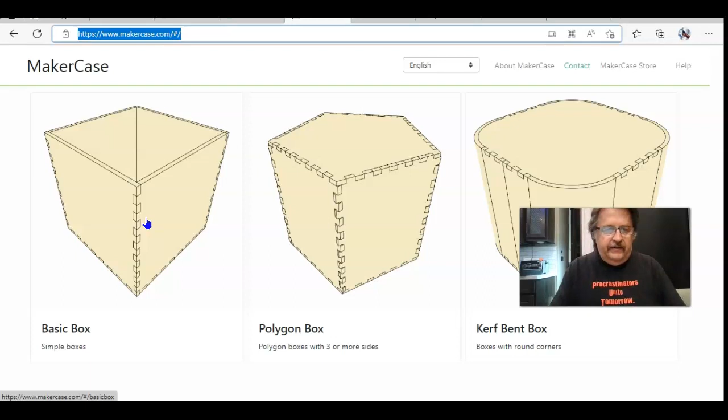So you want to go back to part 1 of this series to see how we got to where we're at with this project so far.

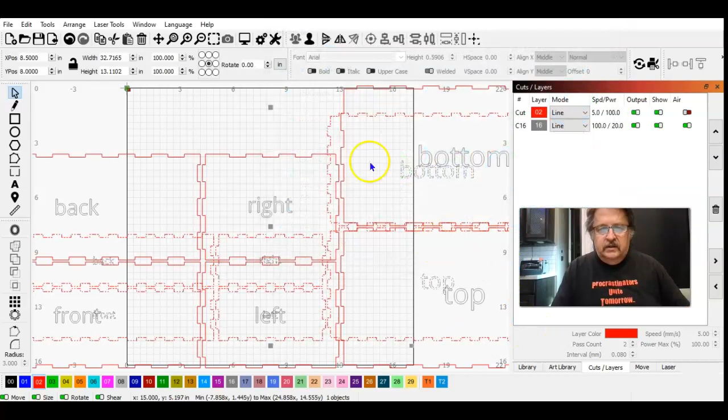Now we're in LightBurn. Essentially, I created 2 boxes using MakerCase. It was pet stand, and I wondered if I could import both at the same time. We're going to find out. Open - yeah, we can. Hey, I just learned something new, I can import 2 projects at the same time. All right, let me back out of here so you can see, and separate these. So this was the first box, and this was the second box that was created in MakerCase.

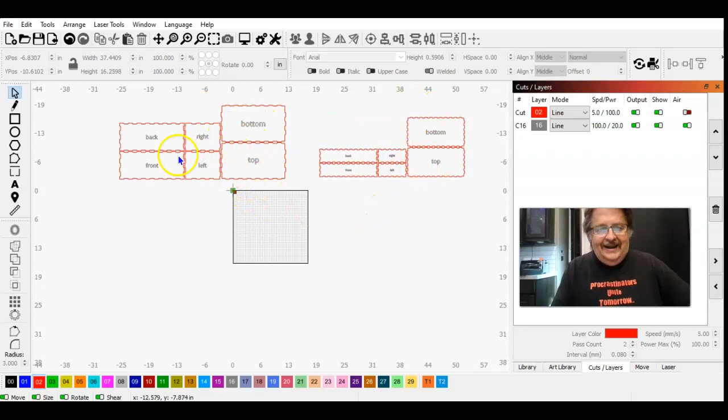I used these 6 pieces and these 6 pieces and edited those down to create this one, I think. No, we don't need to save that. There we go. I'm not sure that's it either. We'll open this one. That's the right one, okay.

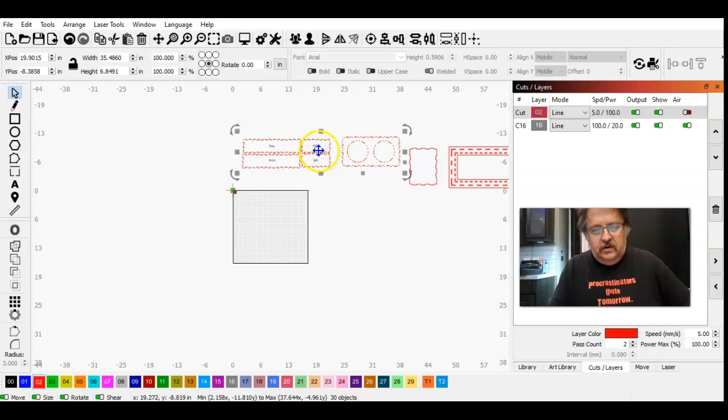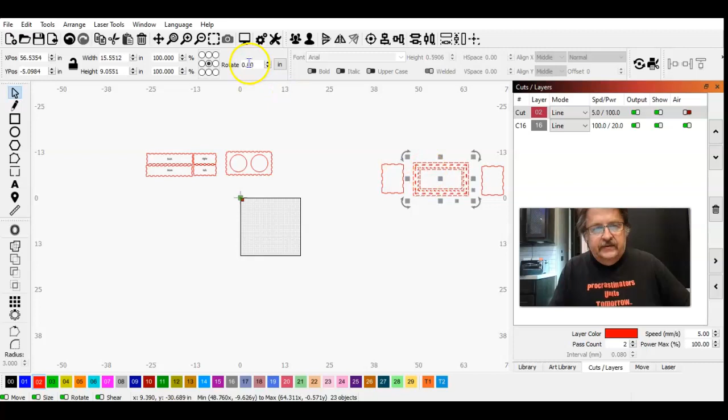So this - 1, 2, 3, 4, 5 - these 5 pieces are part of one of the boxes. I got rid of the 6th piece because I didn't need it. I actually integrated the 6th piece into this piece in order to create these, which will assemble to make a partial cube that will snap to this piece. And then these 2 side pieces here are 2 of the 4 sides that were created in MakerCase that are going to be edited to create the legs that will snap into the bottom of this piece from underneath.

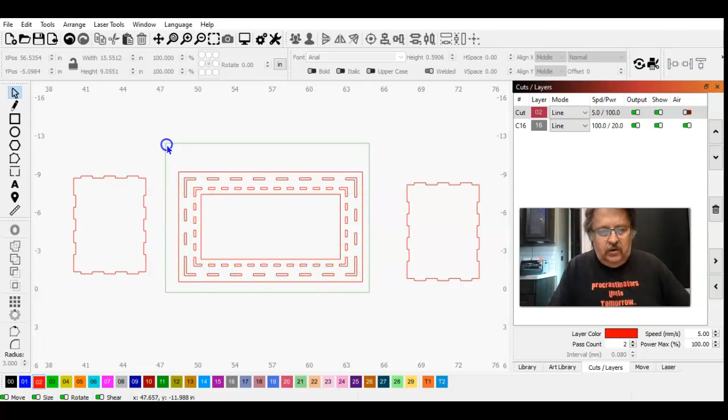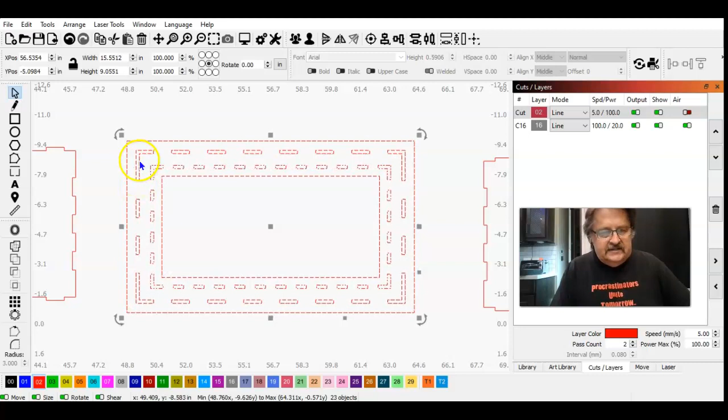So now you've been caught up. All right, I need to work on this piece here a little, because I've got a lot more holes in here than I need, and I want to make the shape a little more user-friendly. First off, I'm only going to need the slots - 1, 2, 3, 4 slots on either side here. And these 4 slots have been merged with these to make an L shape, which I don't need in this case. So I'm going to have to modify this and delete those.

So actually with that highlighted, let's break everything apart. And we're going to hold down our shift button and select each of these pieces, and hit delete. All right, that got rid of those.

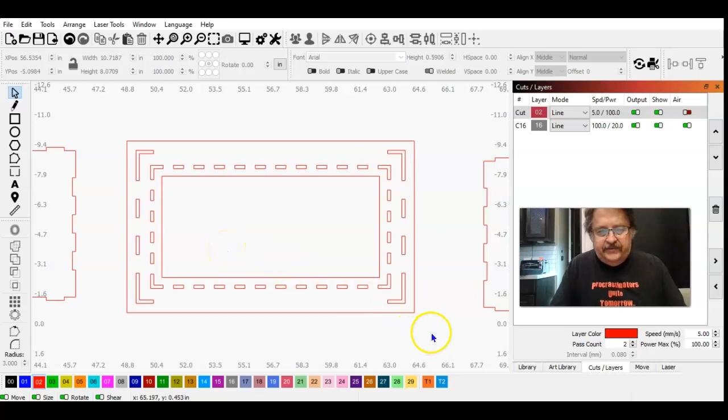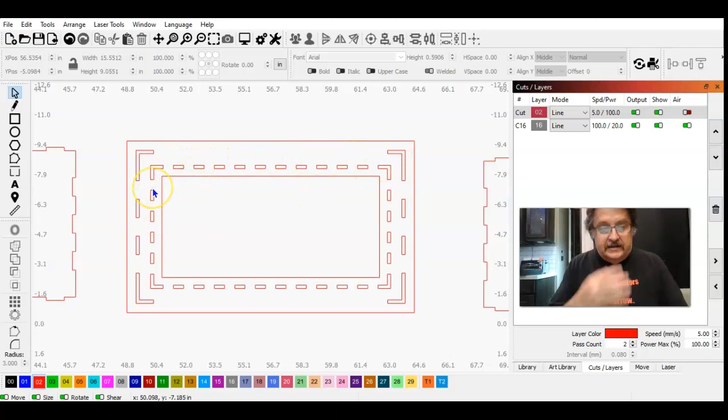Now I need to clean up these pieces. What I'm going to do to keep everything where I need it to be, I'm going to try something - I don't know if this is going to work, but we're going to try this. First thing I'm going to do is lock this to my tool bed, using arrange, lock selected shapes, so that I don't inadvertently mess up this pattern, because it's crucial these slots stay where they're at in order for everything to line up. Now with that locked, selecting just that one, I'm going to duplicate it and move it off the tool bed so I'm not messing with my original design at all. Now I'm going to zoom into that piece, and zoom out a little so we can see it better.

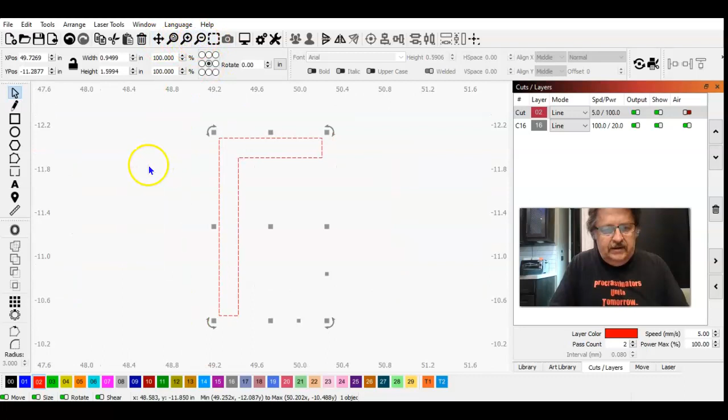There's probably a better way to do this, but this is how I do it.

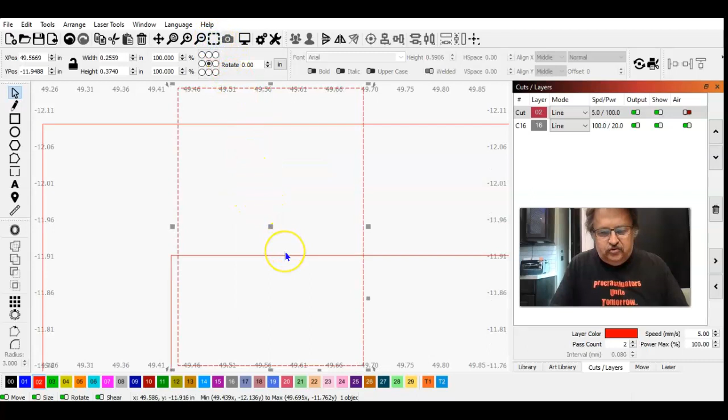I just create another rectangle that I'm going to use for a cut piece. I need to make sure I get those lined up as precisely as possible, so I'm going to zoom into that. Now I've got my control arrow set to a very minute movement.

I should hit control and arrow left until I'm looking for that series of Vegas lights, as I call them, to disappear. You see how you no longer see them? Back it off a little, now you can see them. So that's telling me once they disappear, that's too far. That's lined up as precise as I can get it.

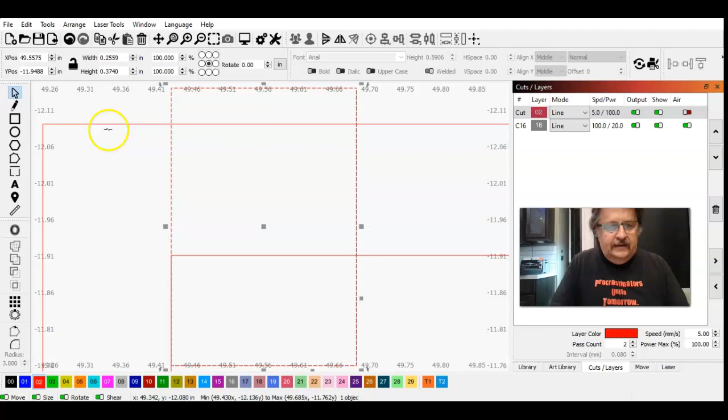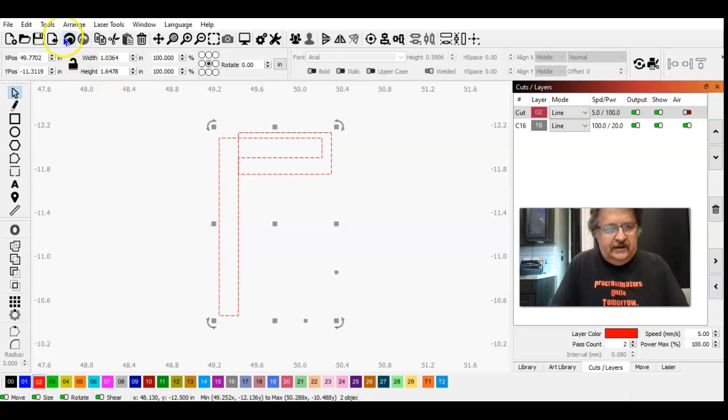Now, if I select the main shape again and zoom out to that, I need to cut that. Actually, I'm going to encompass all of it like so. Now with that selected, hold shift, and use my assistant - if you've been watching my videos, you know this is my best friend. Don't want that, don't want that, don't want that. That's what I want.

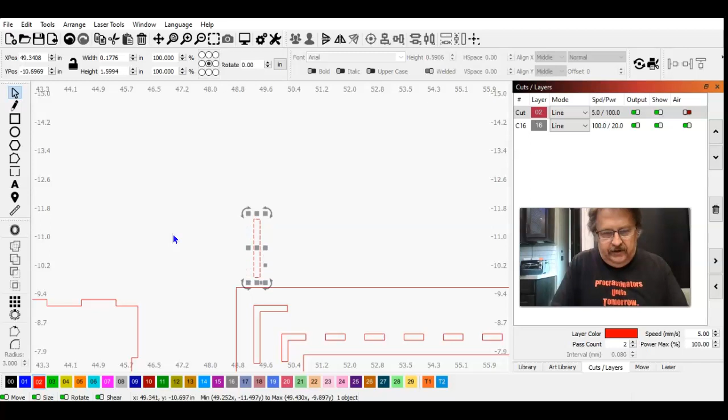Okay, done. Now I can zoom out, zoom out. Now, when I moved this a minute ago, I just moved it straight up, so I can bring it straight back down with my arrow keys, and that put it right back where it was at. Now if I select that, we can see that nicely.

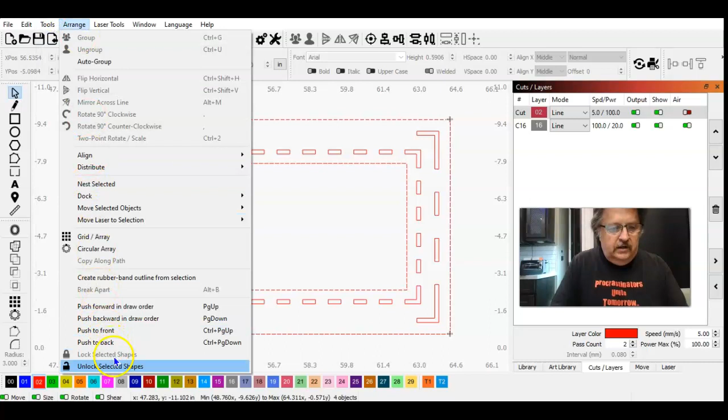Remember, I've got it locked in place, so with it selected: arrange, unlock selected shapes. Now I'm going to click on that one, the long part, and delete. Nope, why is it still showing to be locked in place? All right, arrange, unlock, select, and delete - it's gone.

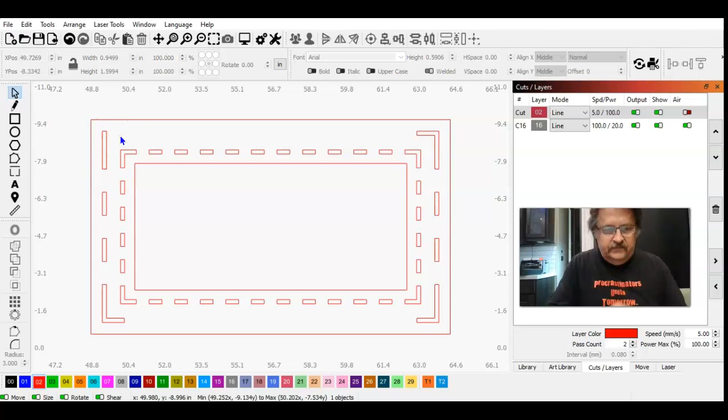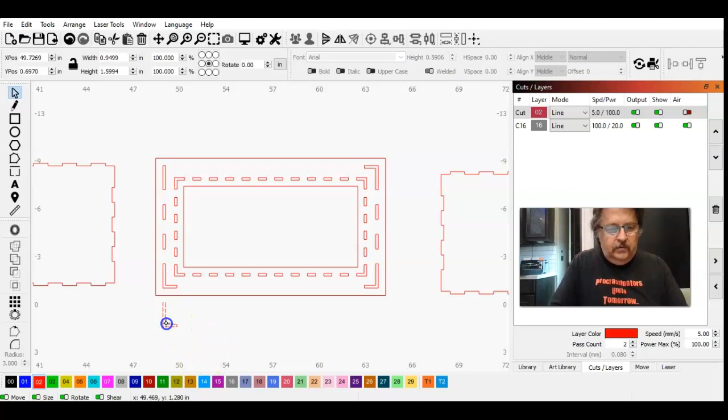Now, again, this is precautionary because I'm a fat fingerer. I'm going to lock everything back in place - arrange, lock selected shapes. That's locked to the tool bed. Select that shape, Control D, moving it down 1, 2, 3, 4, 5, 6, 7, 8, 9, 10, 11, 12. That's out of the way. I'm going to zoom into that one, then out a little where I can see what I'm doing.

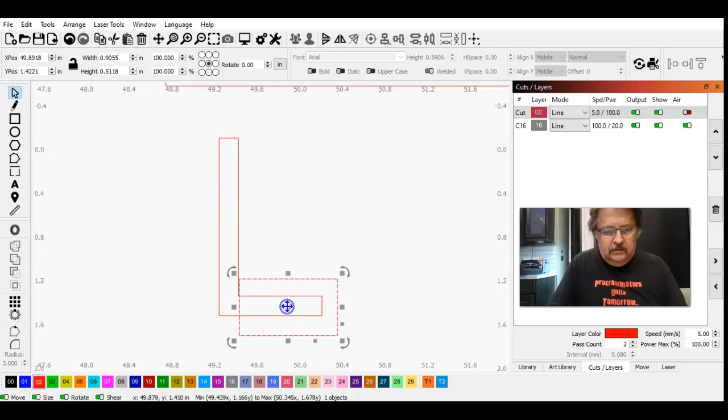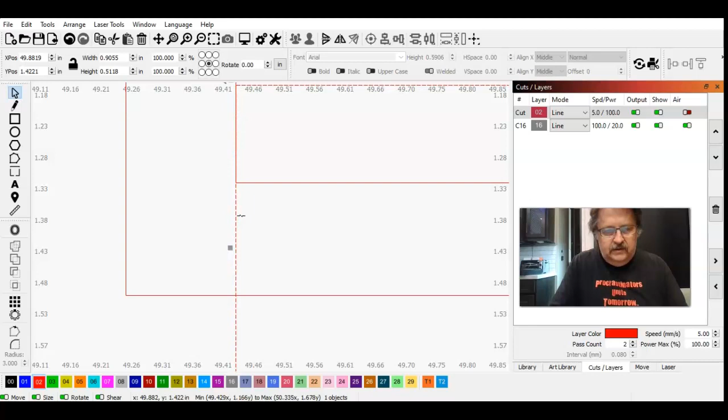Another pattern for my cut shape. Move it in as close as I can with my mouse. And now we're going to zoom in - the tighter you zoom in, the easier it is to see what's going on here. Control arrow left, and that looks good. Zoom out.

That's already highlighted, so hit shift and that button. Use my best friend - subtract B from A. Okay, yep.

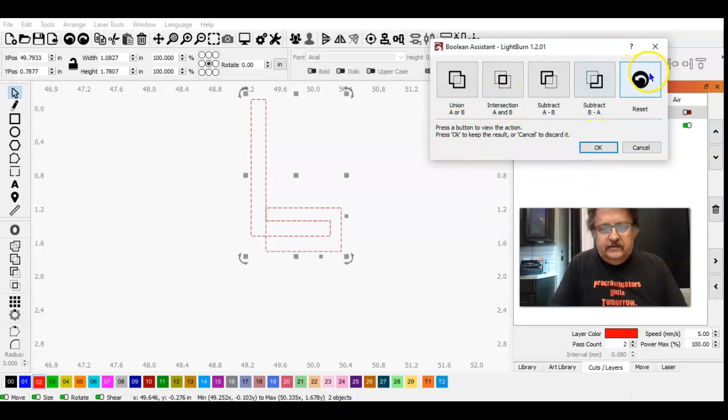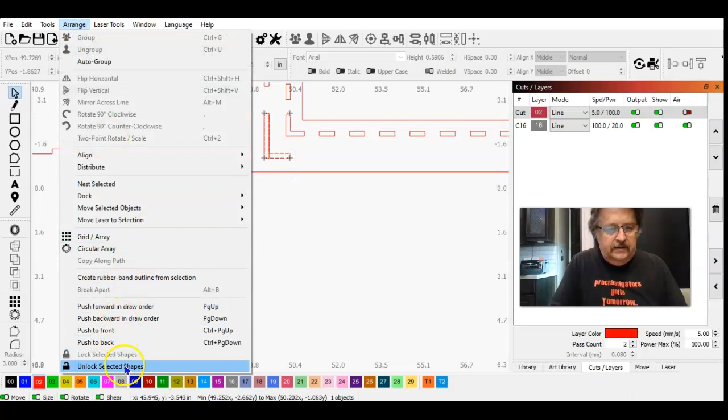Okay, zoom out. Should come back up 12 spaces: 1, 2, 3, 4, 5, 6, 7, 8, 9, 10, 11, 12. Nope, I counted wrong - 13. All right, now selecting the piece that I just deleted, we're going to go back to arrangement, unlock, and delete.

So now all I have there are the 4 slots for that leg to tie in.

I'm doing that to show you how I edit, but there's another way you can do this. I've already created the slots that I need there.

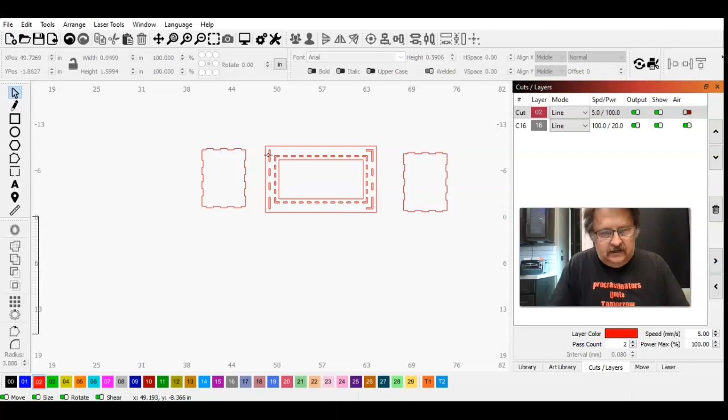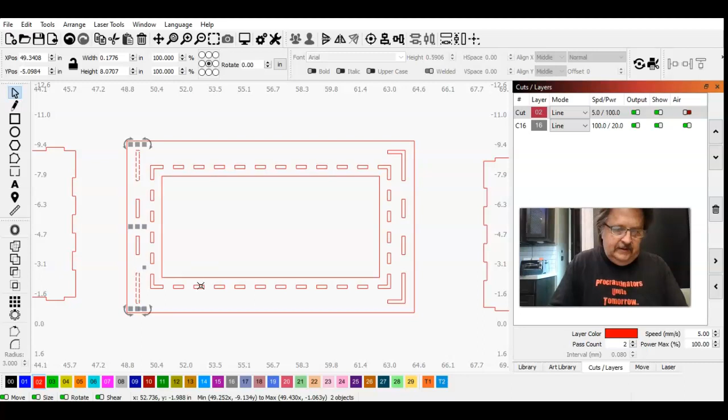So if I select - I'm on my select tool - select the first one, I'm going to zoom in so I don't accidentally bump it. Select the outside of that, let's zoom in. All right, you can see that the outer piece is still locked in place, but I can select one - that one's locked in place. With shift, that's locked in place too. Maybe it ain't. All right, now Control D.

I just duplicated those two pieces. Now that I've got them duplicated, I can arrow them over and put them in place for these, and delete the others without having to go through the whole ordeal of editing. But I've got to get them precisely in place - I didn't have the luxury of just tabbing straight up or straight down.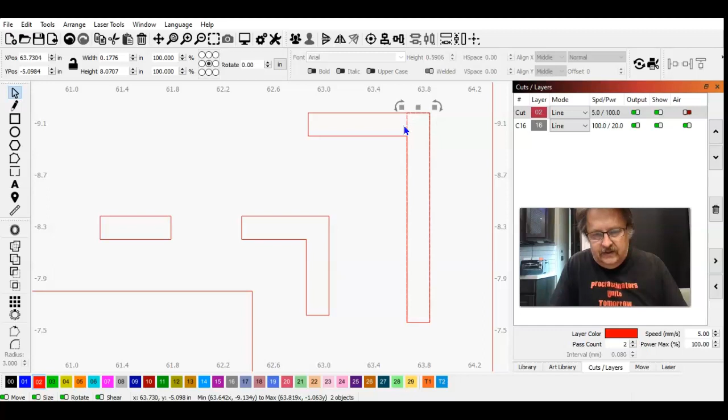That's too far - you're starting to see it come out. Looks like there's... I'm going to go in even tighter. That looks good. That looks good, all right.

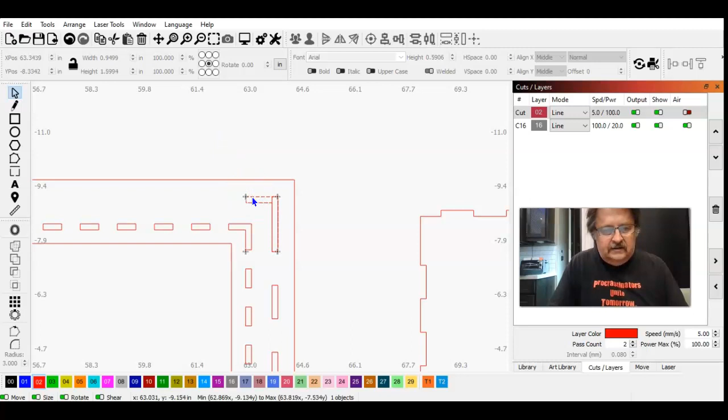Now, if I select that, it's locked in place. You shouldn't be able to delete that with it locked in place, but let me try. No, that's the reason you lock it. All right, so we got to go to Arrange, Unlock Selected Shapes, and Delete. And go down to the bottom.

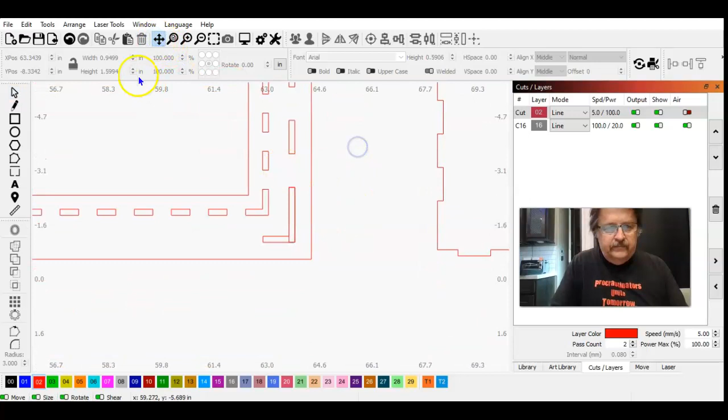Select Tool, select the shape, unlock selected shapes, and delete.

All right, now let's select that whole thing, unlock it all, group it all. That piece, the slots are now what I need them to be, but I'm not through with the overall design of this piece. So let's come back here and zoom into that piece.

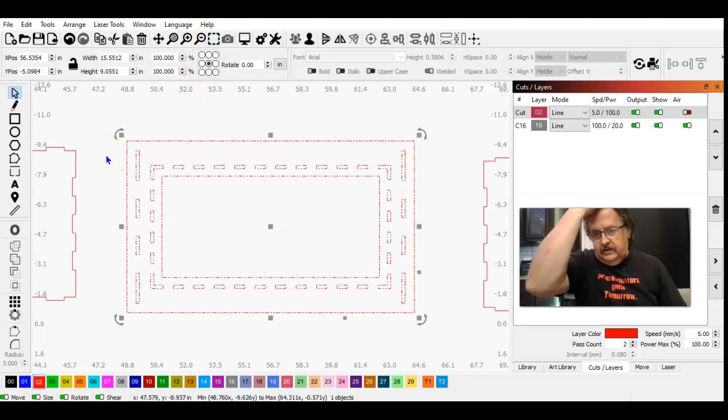If you watched one of my videos I produced in the middle of doing this project, you'll understand what I'm getting ready to do. If not, you need to go back and watch the video on how to use radius in LightBurn.

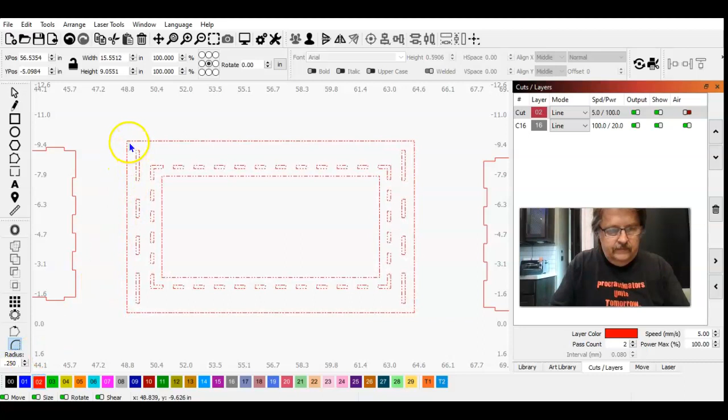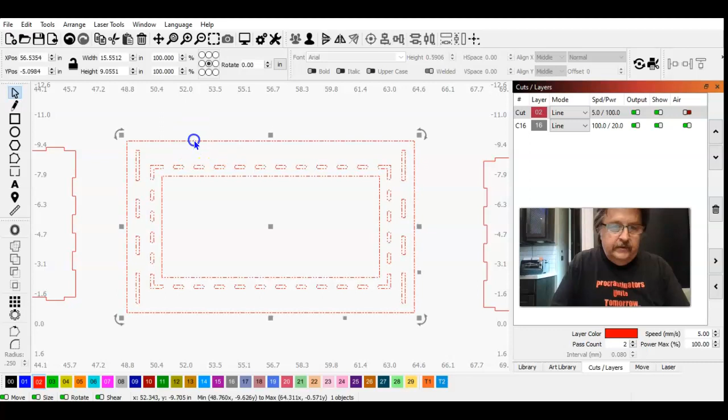All right, that's selected. Gotta unlock it. Tools, arrange, unlock. Actually, I gotta select it, unlock it. What's the deal, Pickle? It's not locked. Oh, I've got to ungroup it. All right, ungroup everything. Select the outer shape only, radius.

And I'm going to do more. Maybe not quite that much. I like that. All right.

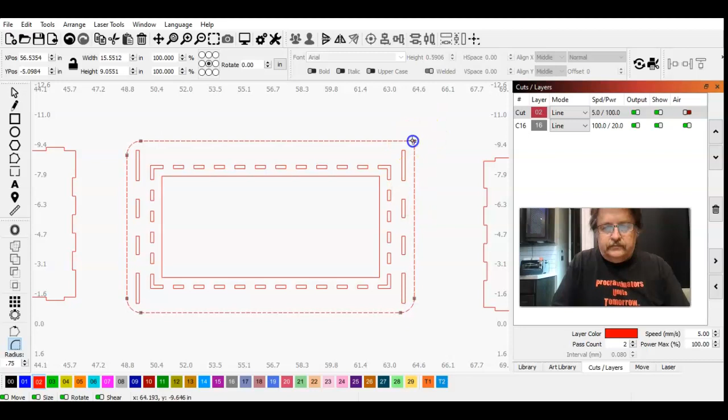And group it all back together. Now I'm done with that, with the design work. Now I need to change the shape of my legs.

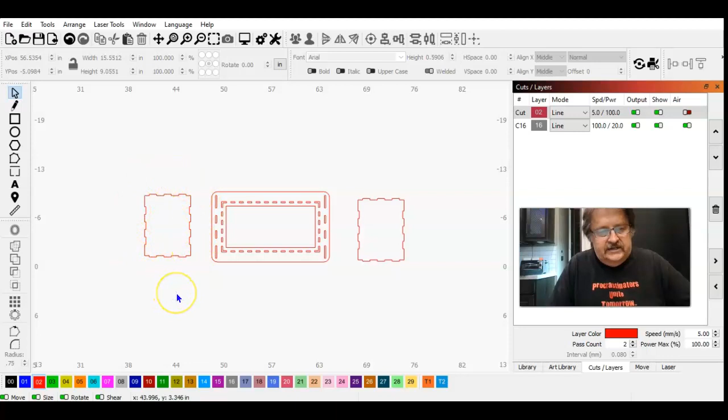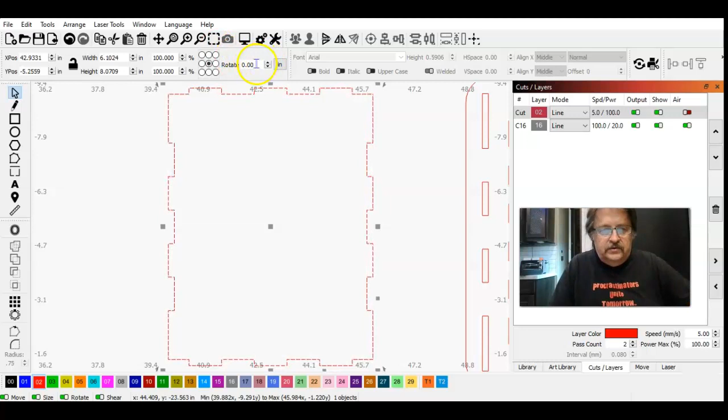All right, these 4 tabs across the top are going to snap into here. I don't need the tabs on either of the 3 sides. So let's go to that. And I'm going to rotate this 90 degrees, and I'm going to do the same thing essentially that I've done with the other earlier - just create a box that's large enough to encompass all of it.

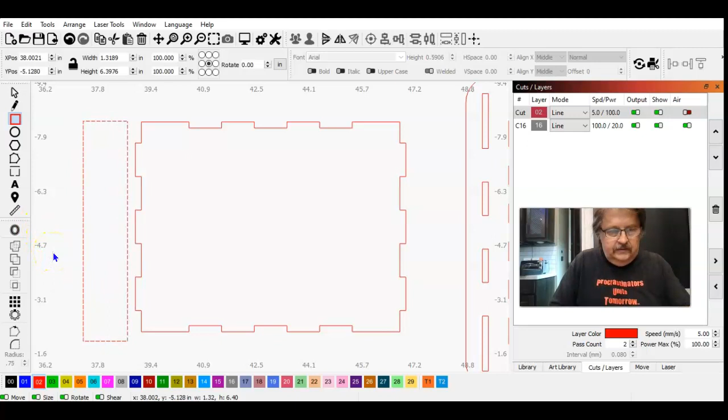Control arrow to get her in there.

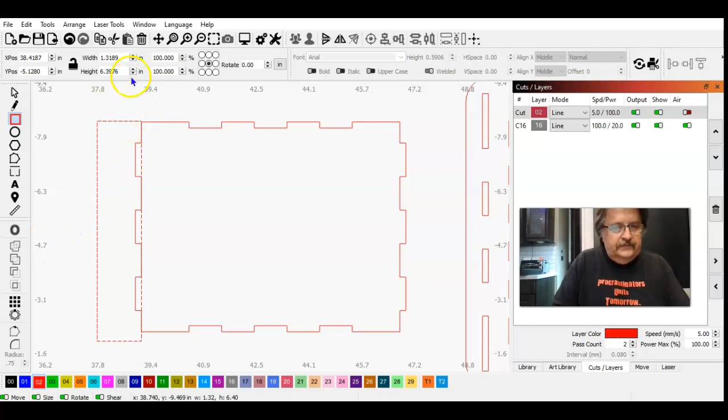That's looking good, but we're going to zoom in and double check it. All right, zoom, zoom, zoom. Actually, go select tool and zoom into that one.

See, I went too far. That's usually me, I always go just a little too far. And then the police are called, and the sirens are... I'm kidding, no I'm not. Yeah, I am. All right, so now zoom back out.

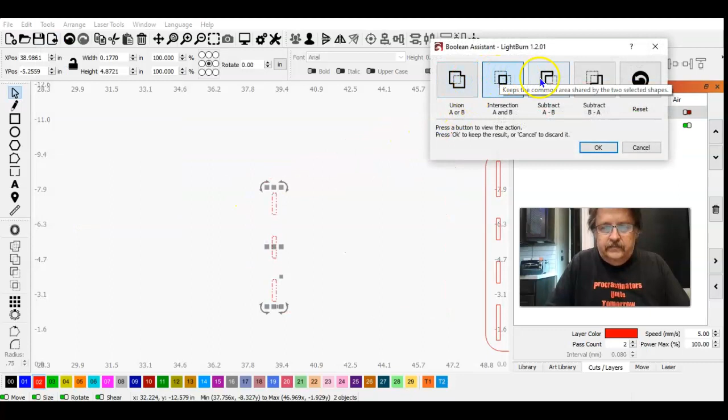That's matched up pretty good. It's already highlighted, so select the next one, open up my best friend and take a look. Nope, nope, nope, yep. And I got to do the same thing on the other two sides.

Control arrow to get those minute movements. Now, if you're not aware of how you control those movements, of course you use your mouse to click and drag it around and change the size and the shape, but also if you go into your settings screen, under snapping and shape move increments, control and arrow, here's where you set those adjustments. I've got mine to 0.0004, which you can go to 0.0001, but man, I don't think since the laser cuts on a 0.08, this is more than enough. But you want to be really precise with it to make sure you don't have any open cut paths whenever you do a movement and use this as a cut tool like this. So that's how you adjust those increments.

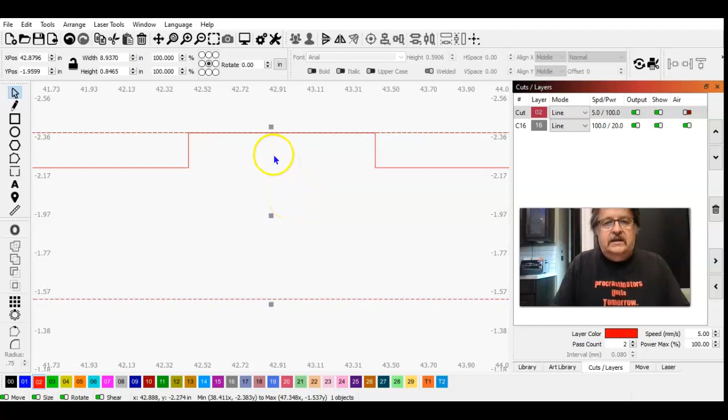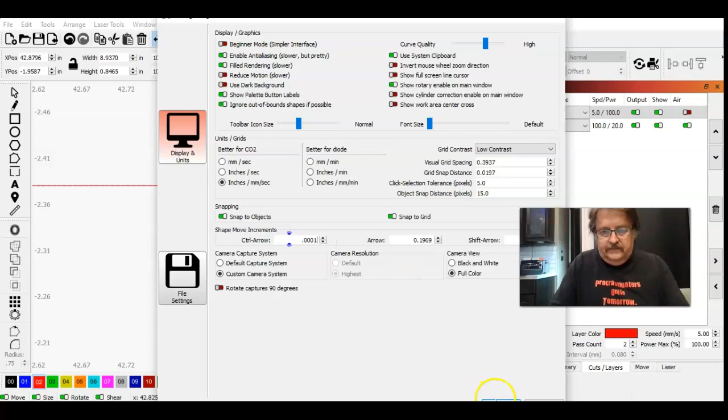Zoom on in, pan down. So I've gone a little too far. Control arrow, that's too far. See if you can keep going in. So that's a little high, that's a little low. And here's an instance where you want to get really, really OCD. You put 0.0001 on one and tell it OK.

And now let's get that again. In fact, I'm just zooming in, and now I'm going to pan down, bring it down to where you can see. See, it's a little below the line. If I keep going in... Control Z. That's as small a movement as you can get with the increments there. Now I've gone above the line so that when I cut and weld those together, that should work just fine.

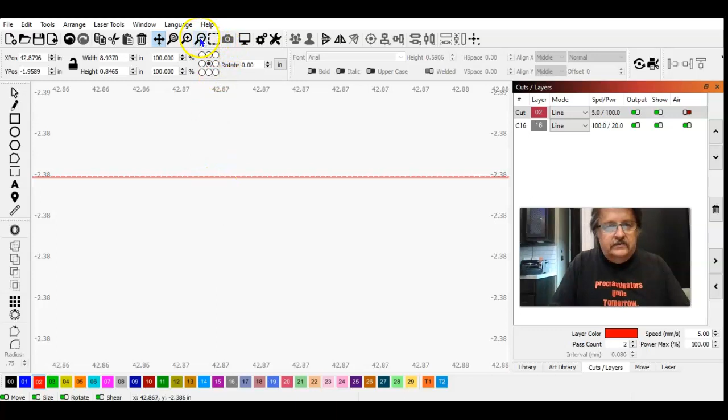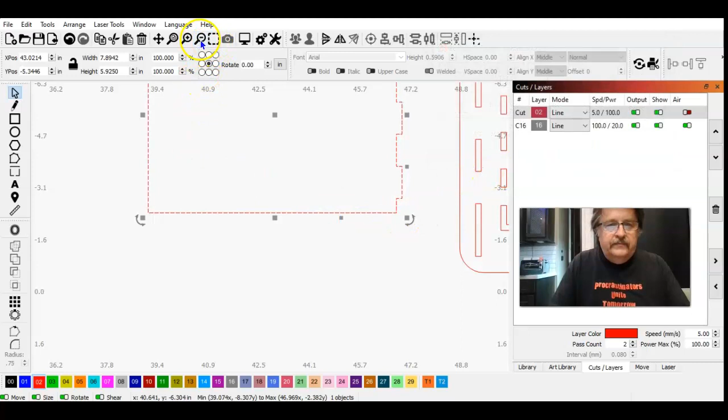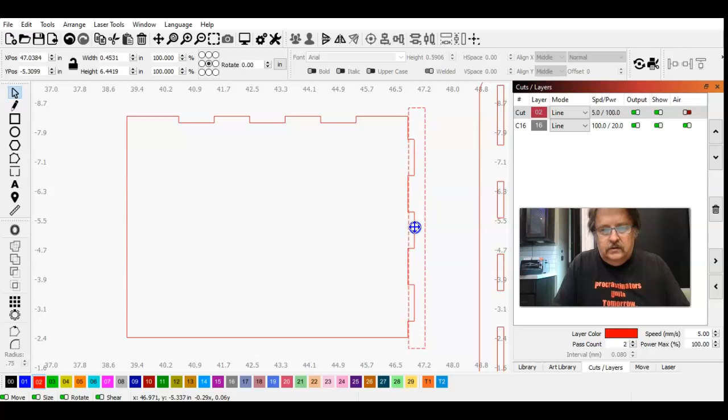Select tool. You can hold your control when you move your mouse, and it also moves it a little slower too. But you can't get in there as precise with the mouse, not with this touchpad that I'm using. So we zoom in.

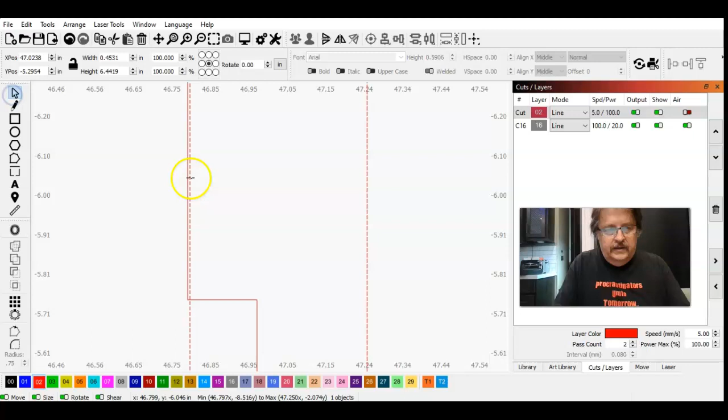Pan down, and we're going to bring it over. Control plus the left arrow, get her as lined up as close as possible, and if not, just slightly inside. That looks good.

Zoom back out, select the second one with the shift key. Now...

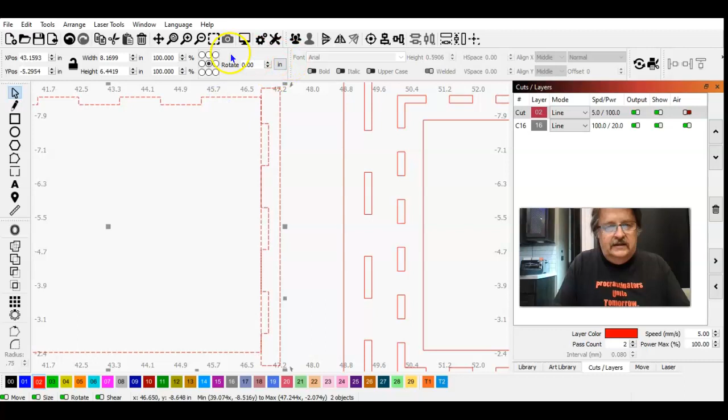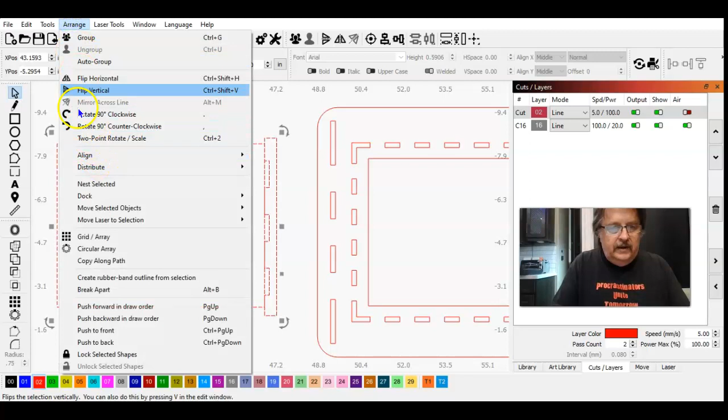This Boolean assistant, I've mentioned this in the other ones. When you open this up, it gives you all these different options, and you can watch what's happening, and this is why I like it. You go out where you can see the whole thing, all right, there's both shapes. Go to Arrange, Tools, Assistant. Union A or B marries them together completely. You've got the outline of both shapes.

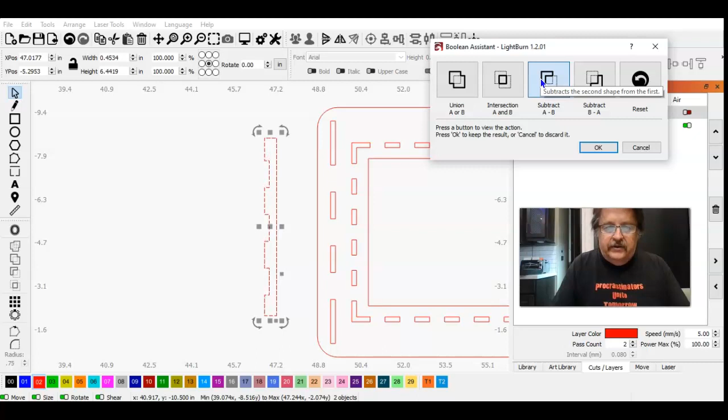Intersection keeps only what's inside of that piece you put up there. It's just keeping the tabs and part of the line. There you're subtracting those tabs from the square you had, so you're using that leg as a template to cut out into your square there.

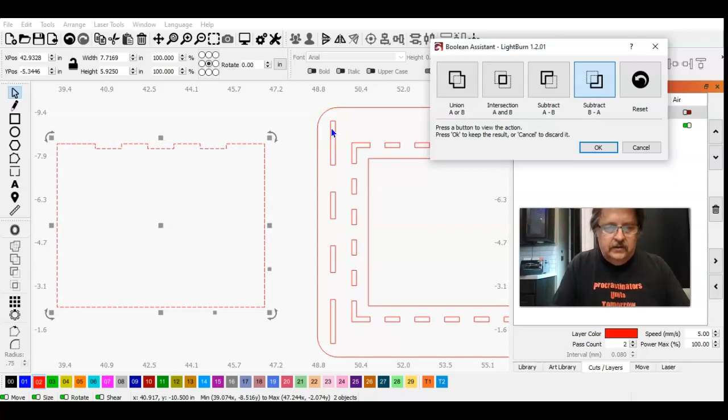And then there's what I'm looking at now, subtracting A and B, or B from A, and A from B, and B from A is the order in which you select them. Which object do you select first is A, the second one is B, and in this case I subtracted B from A because the bigger piece was the second piece. Oh, sorry, I subtracted A from B because... you understand, my brain sometimes switches off.

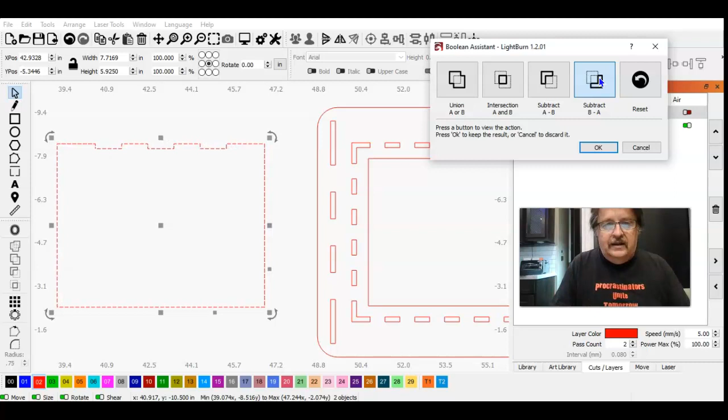For those who aren't aware, I have had a stroke, and it just clicks sometimes, it just turns off. All right, so got that done, that's what I want.

Say OK, and if we scroll out, zoom out, I need to do all that to this piece over here, or as the lazy man thinks, delete that, highlight that, Control D, move her over here. Now I've got two of them.

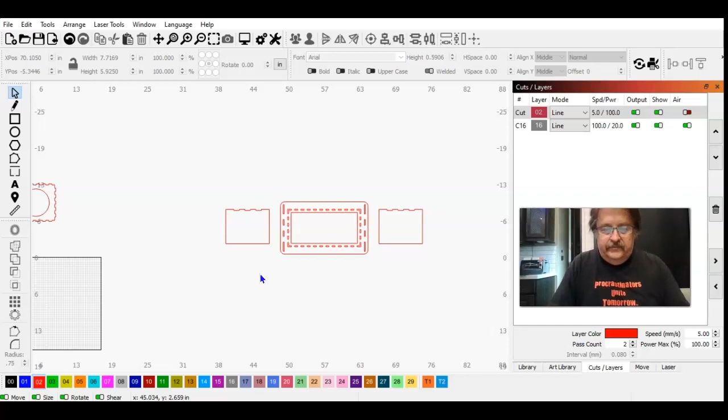Those are ready to fit together, but I'm not done with designing, and that's what this video is a lot about. I'm going to see if I can see where we're at with time on this.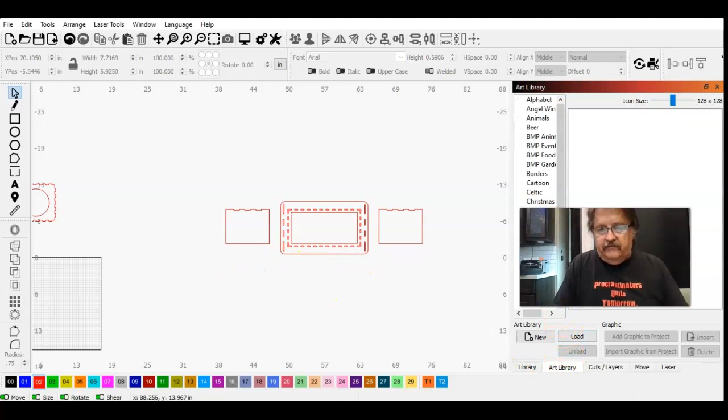If you're not familiar with art libraries, this is an invaluable tool. I've got my pet feeder set up in my library where I've already started bringing in different clip arts and designs, and I've got a dog bone here and dog prints. So if I select this piece of artwork, add it to my graphic, and bring it over here, I've got my snap set up, so that's already snapped to center. If you noticed when I'm bringing it in here, watch that bone just jump right there, it just snapped to center.

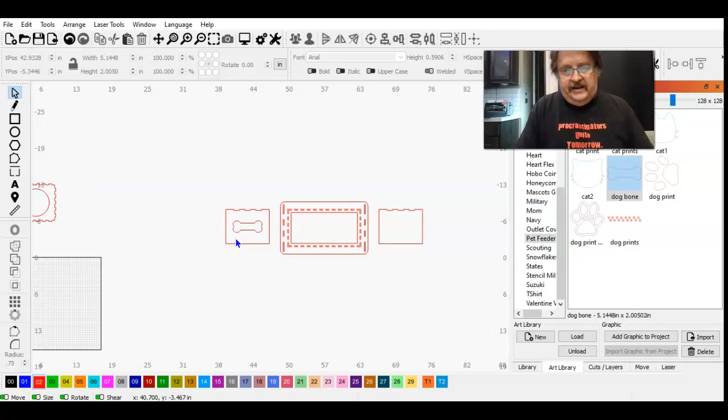All right, I'm going to set that up as a design and cutout for that. It's going to serve a purpose, several purposes. It's going to add character to the part, it's going to serve as handles for carrying it and moving it around. And also, that dog bone shape is waste in this project, but now I've got a tag that I can sell, ID, engrave for someone's personal use. Put a little easel on it and put their dog's name on it. So, waste not, want not.

All right, so you're going to want to tune in for part 3 for the design aspects of the pet feeder. I hope you've enjoyed this video.